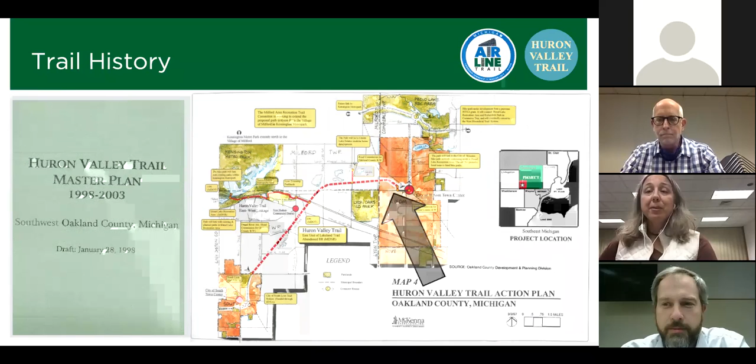And so phase 2 is right there. And so we will actually link up a small portion in the city of Wixom and also in Milford Township. And then taking a look at the regional scale for regional trails, we've got a great cross-county connection that uses the Huron Valley, the Airline, the West Bloomfield Trail, and then the Clinton River Trail that goes from east to west. And what some folks don't know is we actually have 2 cross-state trails that cross in the city of Rochester.

The Iron Belle biking route comes up out of Belle Isle in Detroit, up through Macomb County, then takes a portion of the Paint Creek and Polly Ann Trail on up to the Upper Peninsula. That's a great north-south connection.

Then we've got the Great Lake to Lake Trail that goes east-west. If you want to go ahead one more slide.

Wixom's right there. The Great Lake to Lake Trail is one of our latest destination trails, starting at South Haven and going all the way across the state to Port Huron, connecting many of our downtowns along the way. The Airline Trail, phase 1 and phase 2, are both part of this cross-state trail. We had our first ride last September, and participants rode all the way across the state and used the trail. It was a very good ride to have come through our area.

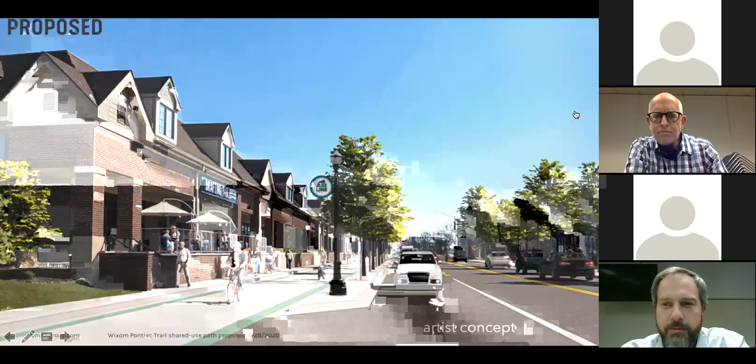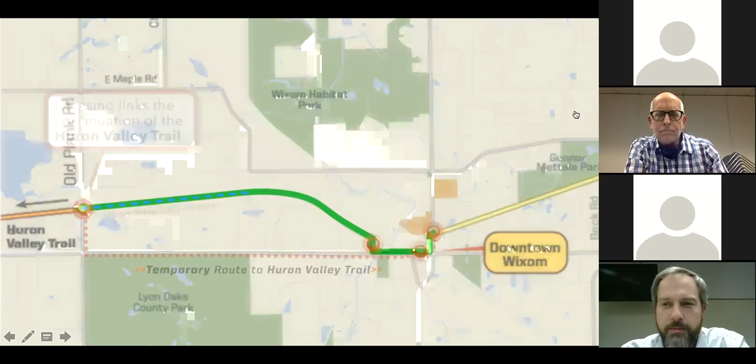You can see there that's a little overview of the trail, and it's important to remember that it's not just phase 2 of the Airline Trail. It's also a continuation of both the Airline Trail and the Huron Valley Trail. Once you cross over from Wixom going west into Milford Charter Township, that 1 mile that goes over to Old Plank Road is the continuation of the Huron Valley Trail. So you're getting 2 trails for 1 here.

Going back to the Airline, just a quick rundown of what we've done so far. We acquired the trail in February 2017. We'd been working since around 2010 with the Trail Council, but it took a long time to buy the trail property. We officially became owners in February 2017, and had a ribbon cutting that May to celebrate.

We completed phase 1 last summer, and we're doing things like mowing and invasive woody debris maintenance. We've had some trail ordinances, and we started our Friends Group, which has been active doing trail cleanups and trail evangelizing as we raised money for things like mile markers. They've been a very effective and great group advocating for the trail.

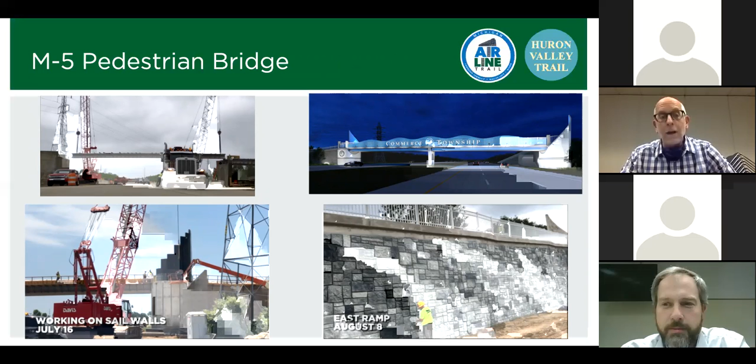Even though it wasn't technically part of the trail project, the M-5 pedestrian bridge is a key part of the trail. Here are a few stills from some of the videos we shot as we built the bridge. If you look around on YouTube and on our site, you can see some of these videos in greater detail about the work we did on the bridge.

We also installed some road crossings, and one of the key things about our trail is that we were able to get funding to put in road crossing signals at just about every road crossing along the trail where there's a substantial amount of traffic.

Our biggest challenge has been that we've had a lot of people using the trail, and not everybody has been using the road crossing signals. We put the stop, press, and wave signage at each crossing, and we want to emphasize that we want you guys to use that crossing technology as much as you can, to alert motorists that you are crossing the road. Even if you don't see a vehicle there, get in the habit of pushing the signal to activate those signals.

That's it for a little where we are on phase one. Now I'll hand it off to Andy, who's going to talk about phase two.

What I'd like to do is dive into each of these, citing some challenges that we're going to encounter with this proposed project. Let's go through some of these slides. What you see here is an overall aerial picture of the entire route. The route is about 2.4 miles, as some of the previous slides had shown.

Starting from the west at Old Plank Road, picking up for the Huron Valley Trail, going east through the old CSX rail right-of-way, staying in that trail until we get to the Corex property, which is the piece that runs north-south, and then comes into the Pontiac Trail road right-of-way. At that point, you'll be heading east to Wixom Road, then going north. The exact route along Wixom Road is still in the design phase.

We're not exactly sure where that's going to go, but we will be going north on Wixom Road and ending at phase one of the airline trail. So that slide just kind of shows you an overview, and the next few slides I'll get into some of the talking points of the project itself.

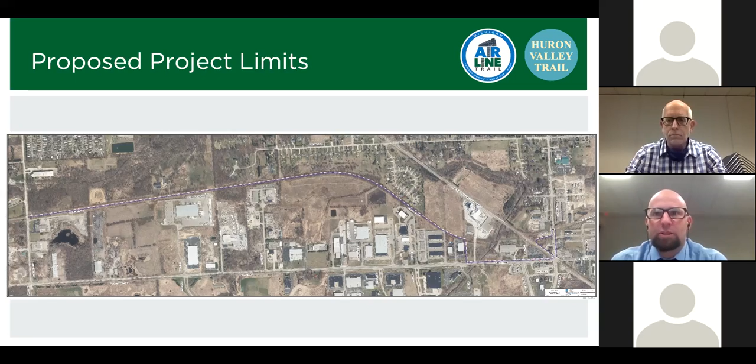With this project, there are going to be some design challenges, as with all projects. Some we want to talk about or show pictures of today are the high traffic volumes we'll encounter along Pontiac Trail and Wixom Road. It's a pretty busy area. Pontiac Trail has a 50-mile-an-hour design speed, so we will be doing what we can to protect pedestrians from the traffic.

We will be crossing several driveways. The trail will also cross Norton Creek, adjacent to and crossing the creek. We have a railroad crossing, and then we're going to be going through downtown Wixom, which has its own design challenges itself.

So with some of these slides here, we'll start on the east end and work our way to the west. This is a slide by Wixom Elementary. The bottom arrow you see is where we would pick up from phase one and potentially cross to the west side of Wixom Road and head south.

The crossing you see to the north is the existing crossing for Wixom Elementary, and we're in discussions with Wixom Elementary and the Road Commission for Oakland County about possibly relocating one of those, but there are some challenges with that as well. That is the hope of the project at this point, to establish a new crossing at the end of phase one.

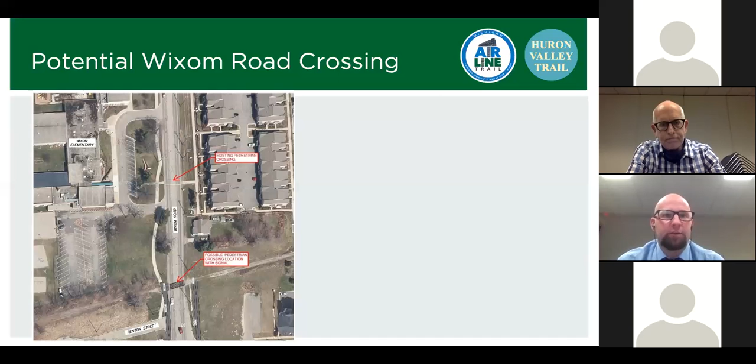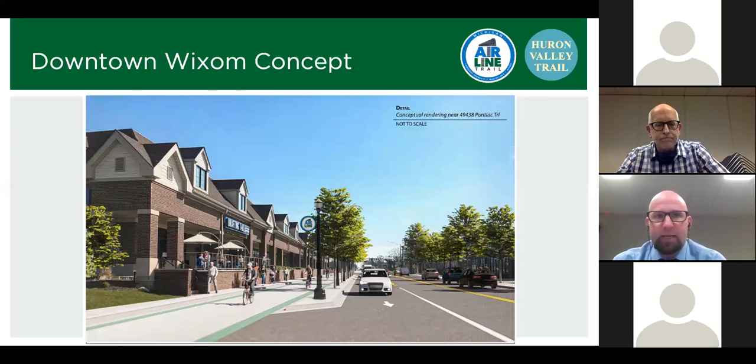So with the heavily congested area in front down there, we are proposing, we're in the concept stage, but what we are proposing is to separate those two paths, creating a 10-foot path for bikes, and then a 5-foot path for the pedestrians.

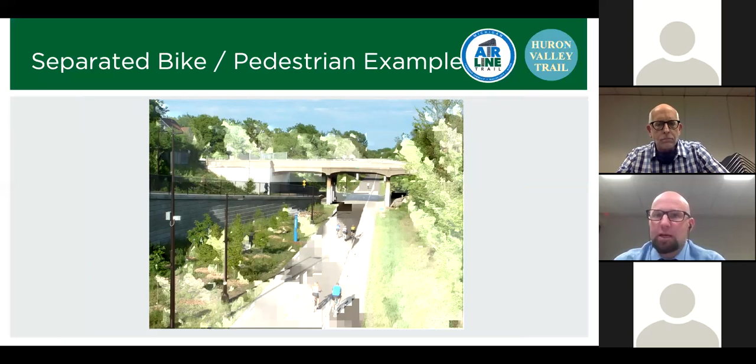What you see on these next couple slides are some examples. It's important to note for these slides, this would only be in front of those businesses. This is not what we would be proposing for the entire path. The path, aside from this downtown area, would be a 10-foot wide path shared by both bikes and pedestrians. But in the downtown area, we're looking to separate that to avoid congestion and allow access to the businesses.

So those are just a couple pictures of the downtown area and the renderings that we have for that area.

This slide here is along Wixom Road, just north of Pontiac Trail. One of the exciting things that we're proposing here would be a proposed trailhead. A trailhead is an area where we would have a parking lot, a parking area for bikes and walkers to park, and then anyone along the trail would be able to stop and take a break, get a drink, do whatever you need to do along the trail.

Some of the potential amenities that we have talked about would be the parking area, shade shelter, bike racks, bike repair station, benches, and drinking fountains are some of the amenities that have been suggested.

One of the things that we would like to do with this meeting is get feedback from all of you guys. If you have any suggestions, we are taking it in the chat, or what we can do is send an email to the manager. I don't know exactly where John's information would be, but if you have any suggestions, or after this meeting something comes to mind, we can get that information, John's email address, and you can certainly send that in to him with any questions or suggestions for amenities at the proposed trailhead.

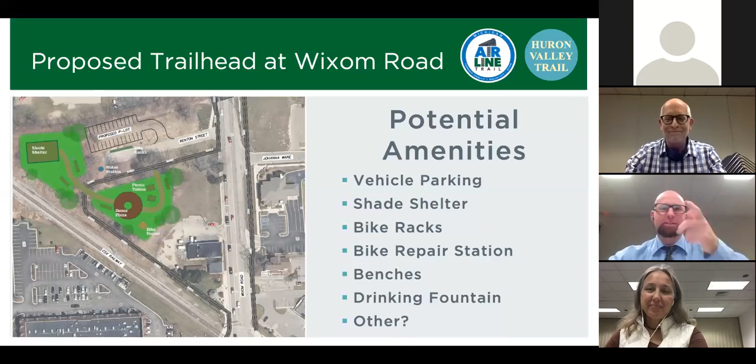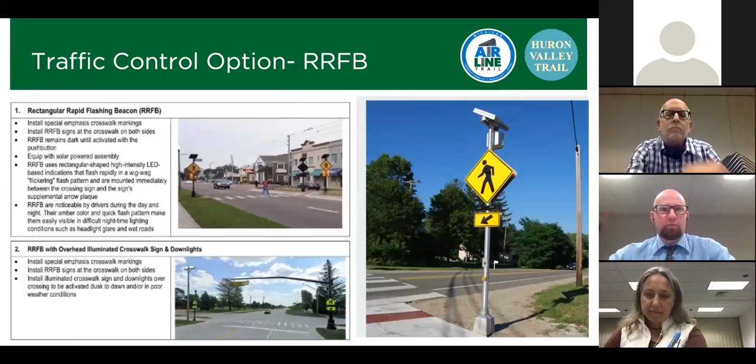If you just hold on to that spot there, I do have a couple slides with the type of crossing, or maybe that's a great segue to get to those. So we do have at this point a couple of options for that crossing there just south of Wixom Elementary.

The first would be what is called a rectangular rapid flashing beacon, RRFB. There's two different types of those, and that's what you see in those pictures. The top one is where you come up to the road, push the button, and the lights start to flash. There's a little description on the left of the picture, but basically they are solar powered.

The second option is the mast arm that comes over with an illuminated crossing and pedestrian crossing signs on either side. So the top one, you get the flashing beacons. The bottom one is just an illuminated sign.

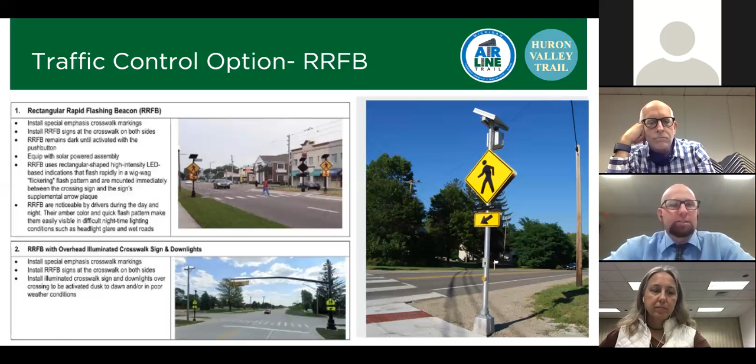And then the third option is called a HAWK signal, an acronym for high intensity activated crosswalk beacon. This is located at a couple different locations along the trail currently, that you see in the lower left, but basically this one is the same thing, push button activated. Once the push button is depressed, the lights come on, they flash, they go to a red, allowing pedestrians to cross, and then they begin to flash again. This one actually stops the traffic.

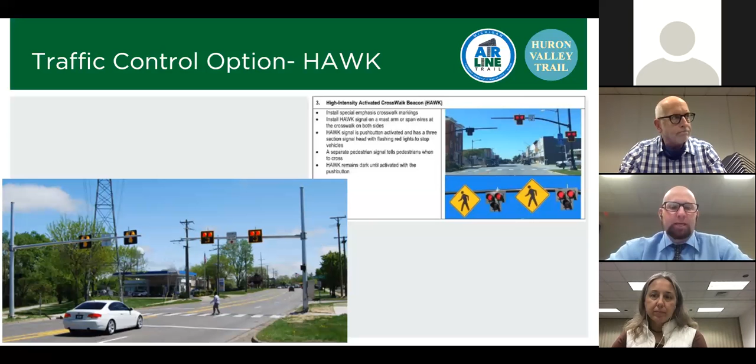So there are a couple options that we are looking into. It is the preferred option to have the HAWK signal. Again, this is going to take coordination with all of the entities involved, the school, the road commission. We need to get buy-in from all of the participants in the project and property owners. But there is a plan to have pedestrian signals at that crossing on Wixom Road.

Panelists, we do have a comment from Mark. He says, I would rather not lose any on-street parking. I'm not connected to any of those stores, but I hate having to look for a parking spot.

John, maybe, I don't know who wants to answer that one. I'll take that one. We're kind of limited with our options since we have to go down to the intersection and cross. The national guidelines require us to have a 10-foot minimum pathway with 2-foot shoulders. And the existing profile that's out there right now just can't accommodate that. So really our only option is to eliminate the parking on street, unfortunately.

But I do understand your concern. It's difficult in the downtown to lose any on-street parking. So we'll certainly make note of that, and if there's any opportunity to save it, we will take note of that. Yep.

And then we have a comment, and I don't know if you guys can see all these, but would it be possible? Carol says there's a lot of parking spaces in the lot behind the building. And then Peter is asking, would it be possible for the crossing to be timed with the traffic light at Pontiac Trail?